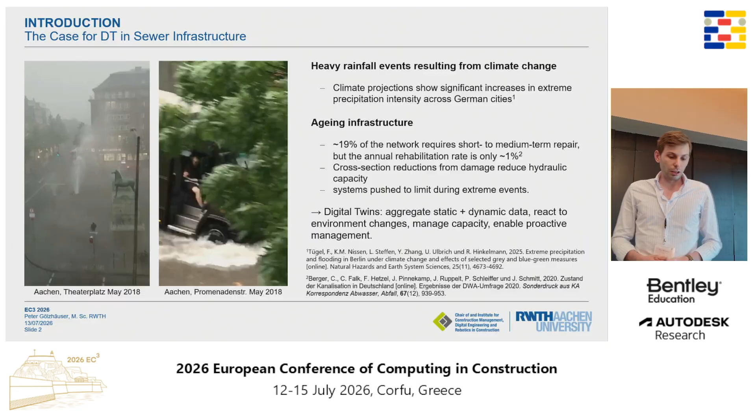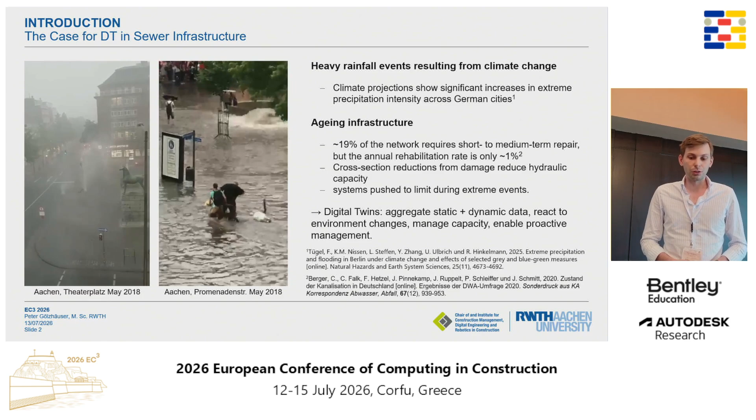Looking forward, we can expect these heavy rain events only to increase over time due to global warming. If we couple that with the aging infrastructure we're facing in Germany, this might be a critical junction in future times. So this is why we picked this topic, because we thought it was a very practical application of the benefits of digital twin. If we have a digital model of the sewer networks with accurate information about damages or profile sizes, we can better manage the system in heavy rain events, for instance, increase capacity or maintenance work.

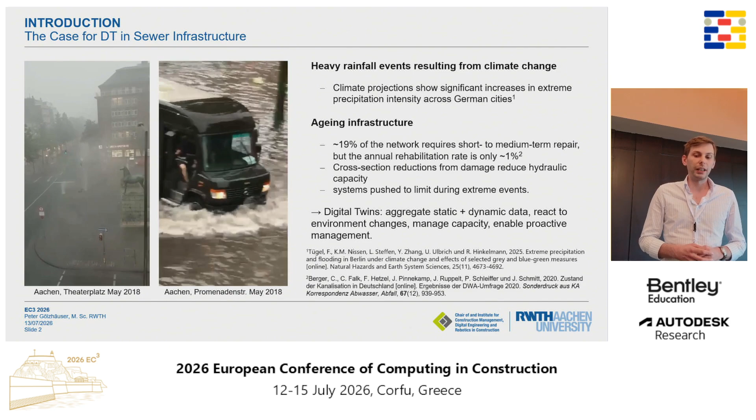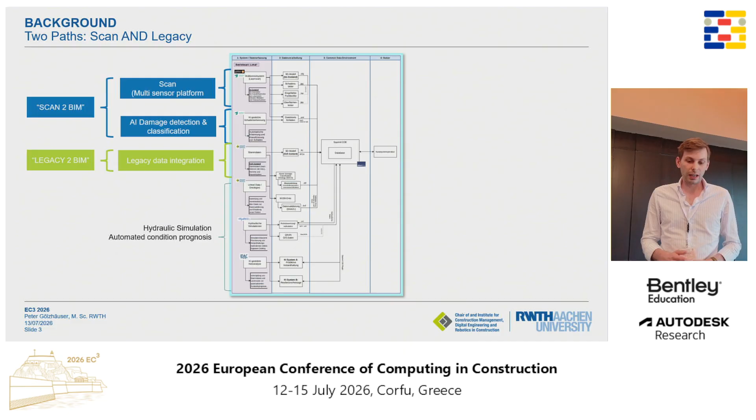To do this, we set up a bigger research project, and my paper tackles the topic of legacy data. But since this is the scan-to-BIM session, and technically my paper is not so much about scanning but more about processing legacy data, I wanted to provide some context on what is happening in the scan-to-BIM. We have a couple of pipelines working together to aggregate data to create a digital twin, to do hydraulic simulations and proactive maintenance.

In terms of the scan-to-BIM, our research partners in Freiburg built a little robotic platform with sensors. We have a 3D laser scanner and a camera ring, and it's a very compact size, so it can crawl through the pipes. It directly tries to fit the laser scanning to the pipe. Depending on the profile, whether it's egg-shaped or circular, we fit the point cloud to it, and we can immediately detect deviations from what should have been the actual profile diameter.

In addition, there's a camera ring that stitches together a view of the inner wall of the pipe, and then we can detect in a two-layer framework first anomalies, because most of the pipe usually is in perfect condition. Damage is only a small part of the pipe. So instead of going directly into damage classification, we first want to see if there are any anomalies, and then try to detect them and figure out what kind of damage we are speaking of.

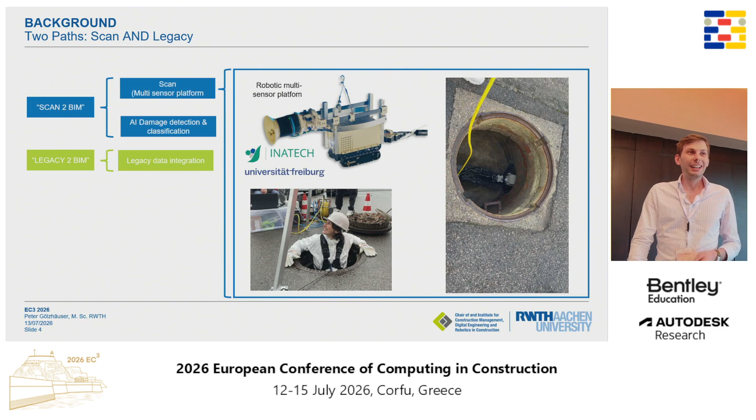Here you can see my co-author for this paper inspecting the pipe segment, I think in the city of Cologne. This is a very nice approach, but of course it's very time-consuming and very costly. To scan one pipe segment, it took us, I think, half of a day. So that's why we turn to legacy data, because we keep records of condition ratings for sewer networks, and we actually have a lot of information already available.

Also about semantic properties like material, inspection history, etc. Plus, we can do this in basically real time. We can take entire systems, pass them through our framework, and then in real time have a 3D model that we can work with.

Maybe some thoughts on the topic of legacy data. Somebody asked me today, why do you call it legacy data? I think we call it that because it was never intended with a digital twin or a BIM application in mind. In Germany, there is a standard for how municipalities keep records for their sewer networks. This standard employs an XML-based formatting. And since we have this data available, we thought, why not use it to enrich our 3D models?

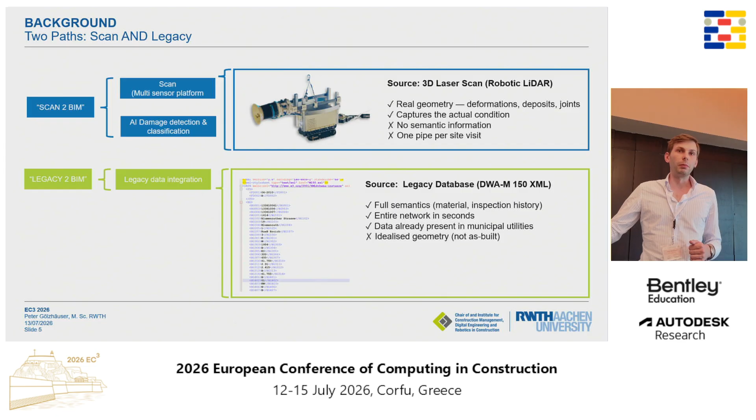But of course, there are some strings attached, because when this standard that describes how this data is organized was developed, it was not with a BIM or with a digital twin use case in mind. So let me give you a brief overview of what's happening in this pipeline here.

So basically, we have our inspection data, and in the first step, we try to generate the geometry. So the inspection data is structured by the pipes or the nodes, and the pipes have coordinates, they have sizes, they have diameter information, and we try to extrude a geometry of the pipe. And then in the second pipeline, we try to integrate semantics and also inspection history and possible damages.

Now, why did we split the pipeline? And you could possibly argue, why not keep it concise together? That was because we wanted to enable basically a second layer for input data. So imagine we could derive the geometry from the legacy data, but we could also use the scan data that we just acquired, and then use the information we have on semantics and inspection history to enrich that scan data. So that's why we decided to split this approach to enable more versatility.

Yeah, so the first step was extruding the geometry, and in the second step, then enriching the semantic information. The challenge there is now how to map the semantic information to the geometry in such cases where we didn't generate the geometry from the legacy data itself. So you can imagine if we use the same legacy file that I showed earlier, there are codes, there are names, we can match them, and we can establish a mapping relationship.

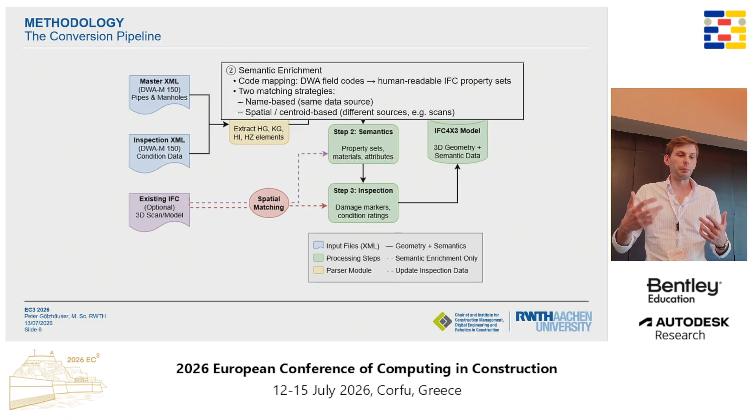In a scenario now where we take a geometric model from laser scan, of course, we do not have this information. Also, more often than we like it, legacy data is not 100% nice or clean to work with. So that's why we developed a spatial mapping technique where we basically try to establish an index tree based on the centroids of the pipe, and then try to map them based on their spatial proximity. So when the inventory pipe described is in a spatial relationship with, for instance, the pipe that we got from the scan data, then we know that there is a relationship, and we can map the semantic data and also the inspection data.

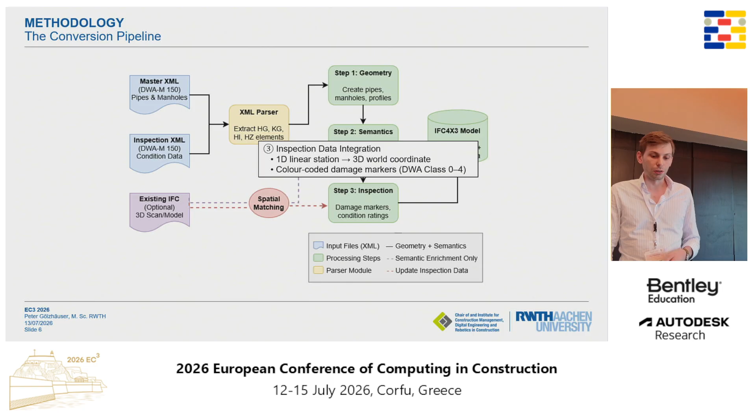Yeah, let me show you the results. So here we see a segment that we passed through this pipeline. So in the background we see with the pipe network, the semantics are now mapped to the individual pipe segments. Plus we can insert damage markers. So side note, we used IfcOpenShell as a library to generate these models.

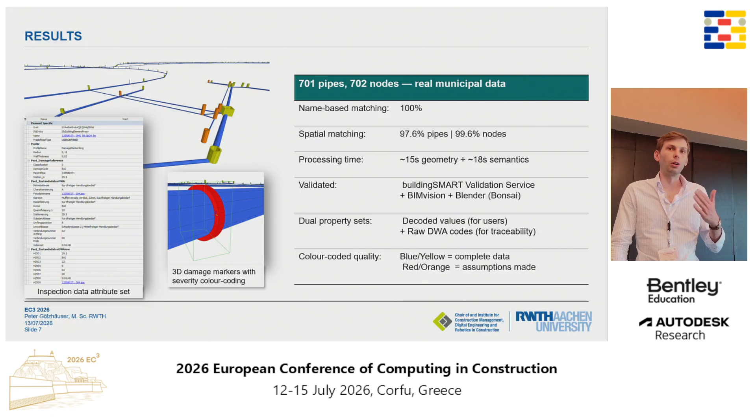And yeah, the name-based matching, as we could imagine, worked very well. So we have a very high accuracy here. For the spatial matching, I think out of 701 pipes, only 17 could not be mapped. I'm going to talk about it a bit in the limitations. Yes, and then we also did some validation through the buildingSMART validation service. Plus, we flagged any mapping issues, so where we could not establish a link between geometry and semantics. So an engineer could look at it and maybe decide for themselves how to map that data.

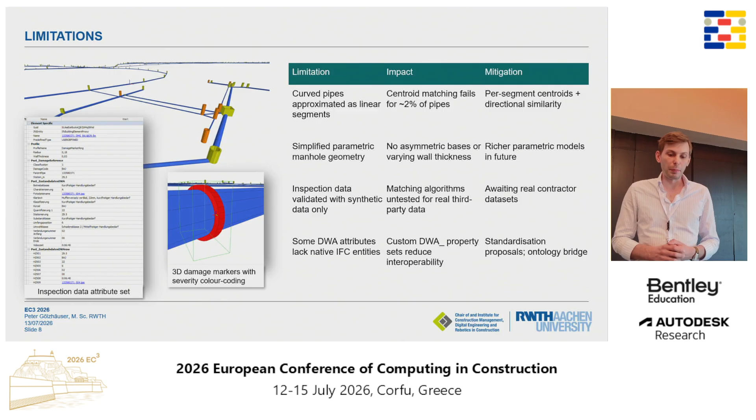Yes, I mentioned before some limitations with this approach. I think the overarching limitation is that this legacy data was never meant to do that. So we're doing that because we have it readily available and we wanted to use it, but we are a bit abusing it in that sense. And so one issue, of course, is how it handles curved pipes. So curved pipes are mostly represented in the legacy data, for instance, with 3 or 4 coordinates. Thus, you can imagine that our approach of calculating centroids and then doing a spatial mapping here created some issues. That's why these 17 pipes, for instance, we couldn't map correctly.

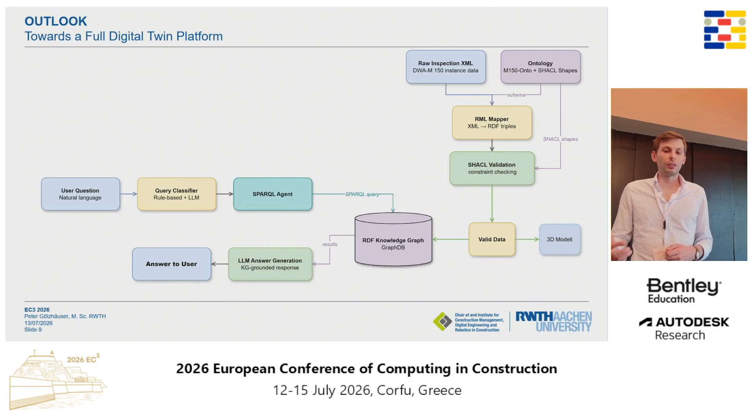Yeah, some outlook, where do we want to go with this? My colleague who also worked in this project, but in Professor Smarsly's group in Hamburg, gave a nice speech about this in the morning. So the idea is that we can now also use this data to create knowledge graphs. So we developed an ontology, we can populate a knowledge graph, we can link it with the model, and then basically create a platform that provides a nice surface for engineers to work with, to have visualization of potential damages, but maybe also to interact with chatbots, for instance, to query for certain types of damages. If you were in the session this morning, you could hear my colleague talk a bit about his ideas for this topic to come.